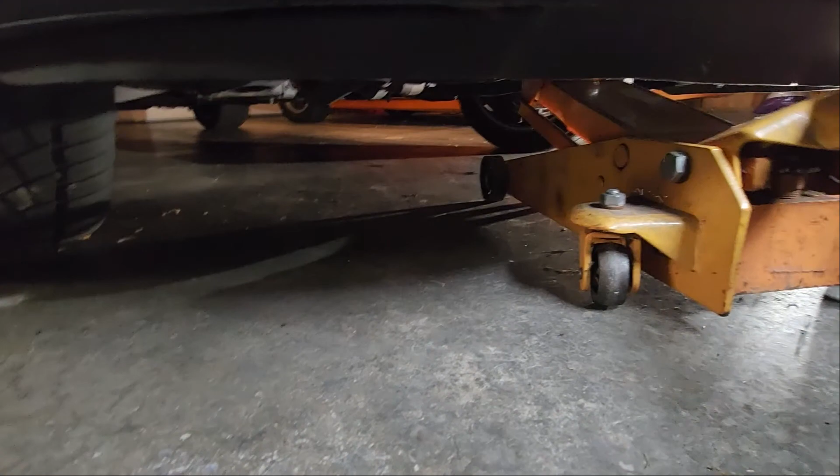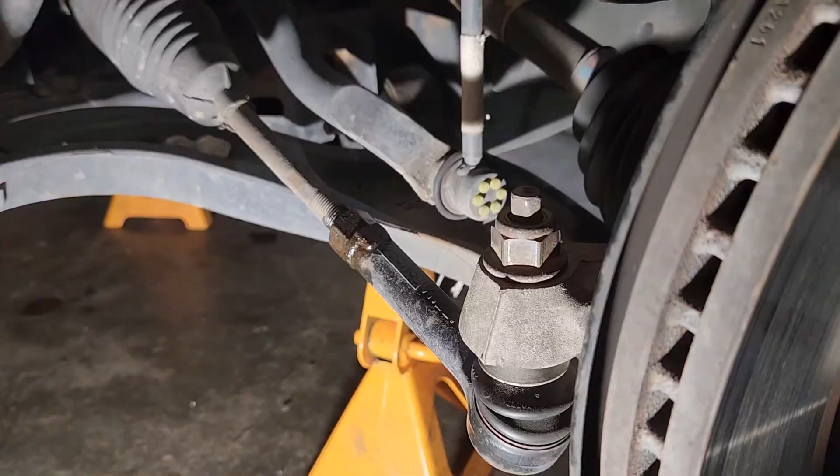Okay, so before you pop these off, or before you really go at them and break them, you want to get this loose here. That way it doesn't rotate on you, so you can use the knuckle here to hold everything. You need a 21mm open end wrench here and a 13 on the shaft to keep it from spinning.

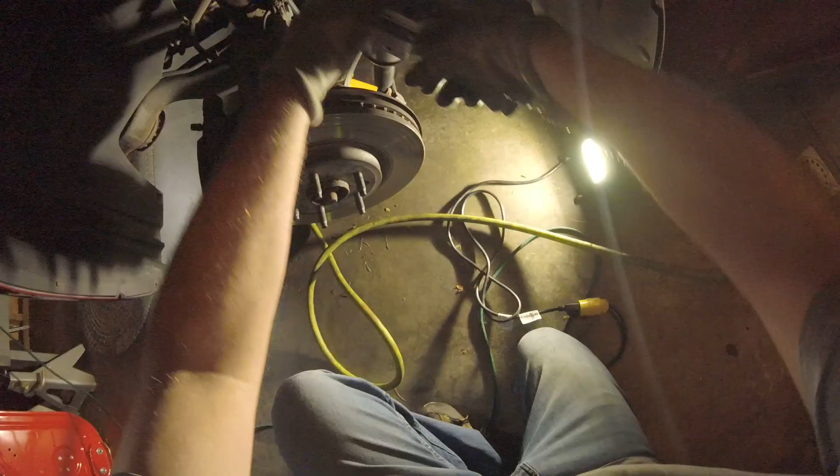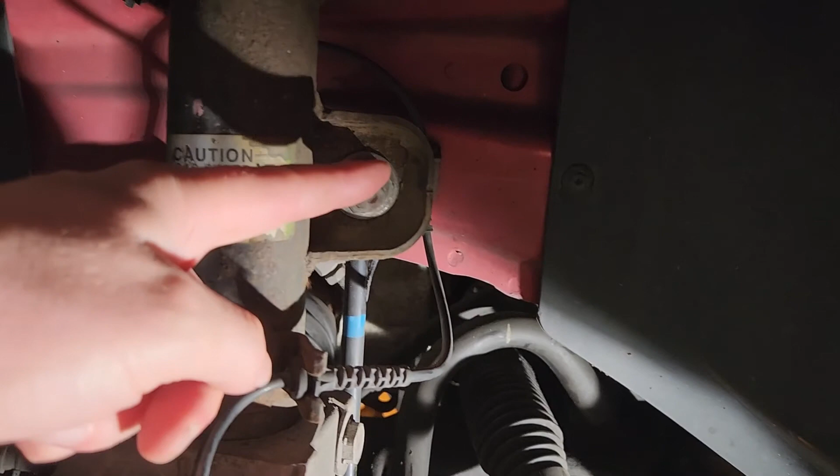Next, I think we'll take the sway bar. We'll hit the upper one. The lower one down here looks kind of hard to get to. I'm hoping maybe we take both of those off. It'll swing up and give us a bit more room in here.

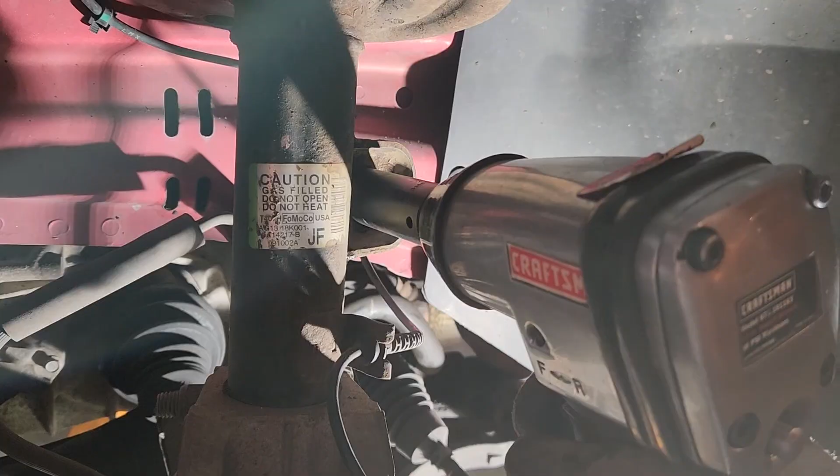Next, you want to make sure the steering wheel is as straight as you can get it, and then I marked it there. You can see it with a yellow paint marker just for reference. You get in there with a 10mm ratchet with a small extension on it, and you can get on the bolt and pop that off. Take note where the flat is — it's towards the front — and the clearance for the locking bolt is towards the driver's side. Just take note of that because you're going to have to get it back the same way when you go to put it back together.

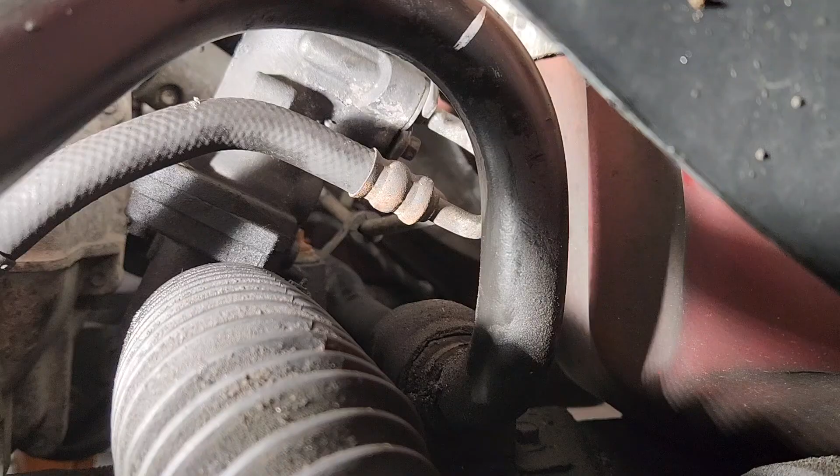After you get that bolt off, what we'll do next is pull the supply line off. You can kind of see the bolt that gets it right there. You can get it from the back side. If you have the SHO version with all wheel drive, it's probably going to be a bit harder because there's going to be a bunch of stuff in the way. This is front wheel drive only, so I should be able to get on that pretty easily.

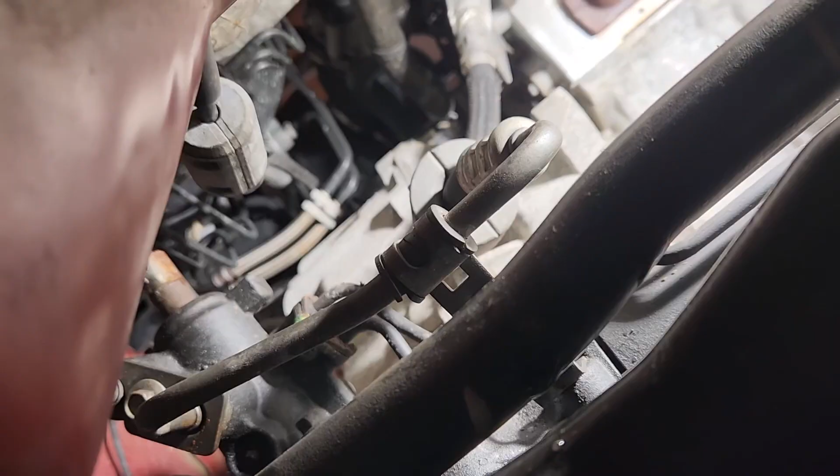Okay, so here's the plan. This bracket right here is held in with a 10mm bolt. You can't see it, but you can get a socket on here from above and work it out. You can see it there. So that attaches there, and I think what we'll do is leave this on here, and then come down and take out the actual two bolts that hold the rack in place.

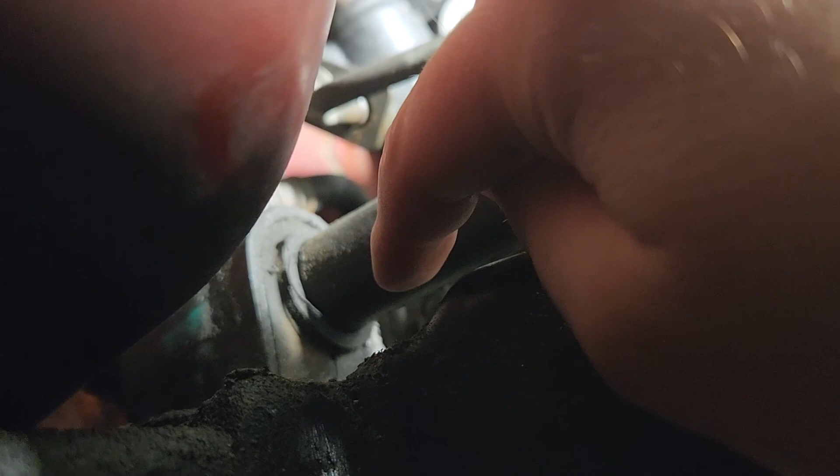Now, what I did do is on this side, I took out both bolts for the sway bar. You can get to this one from under the car, and the front side you can get from the wheel well. On the opposite side, the passenger side, simply remove the front bolt and loosen the back one, but you can leave the back one in. It's kind of tight and hard to get a socket wrench in there, but you can get into it — just leave it in there.

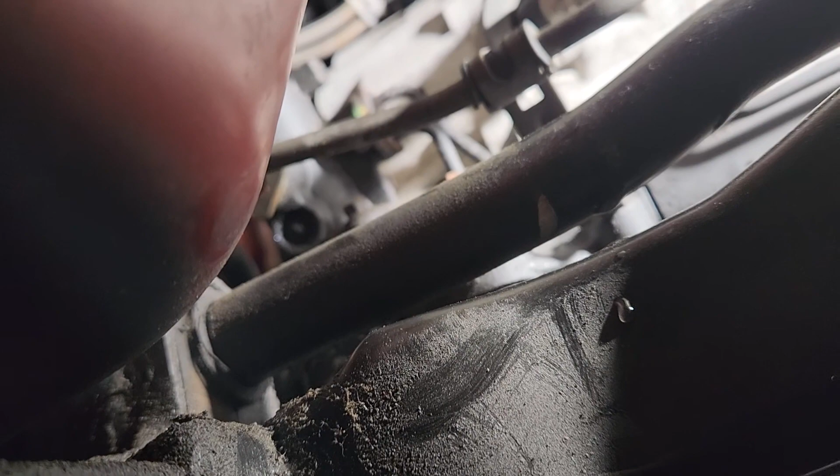I'm going to see if we can swing the sway bar back enough to get the rack out of the way. So that worked perfectly. You take the two main bolts out of the rack with an 18 millimeter and a 15 millimeter on top. Once you do that, you can easily rotate the rack, then get on the bolts that hold the main bolt that holds the line on, and drain the fluid out.

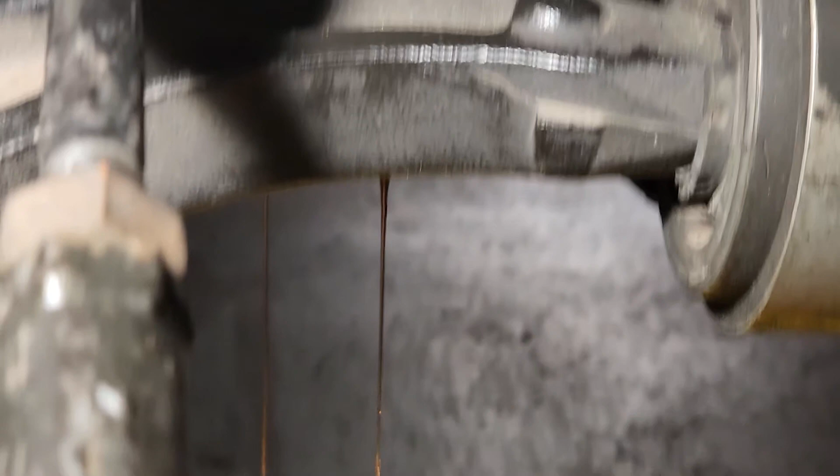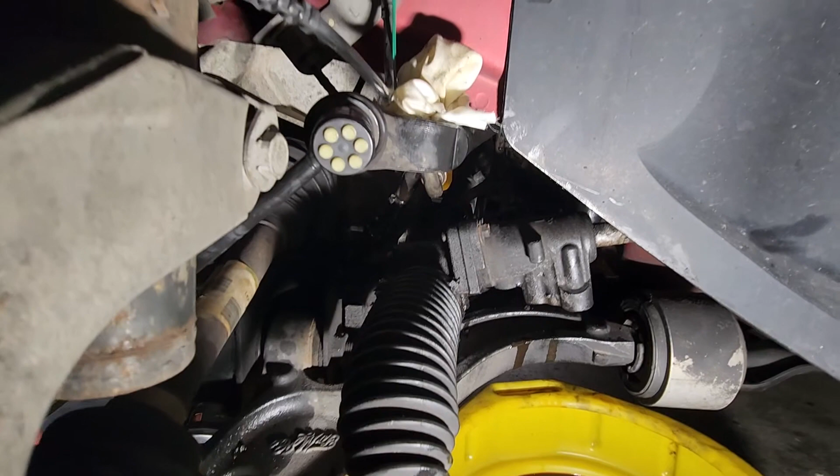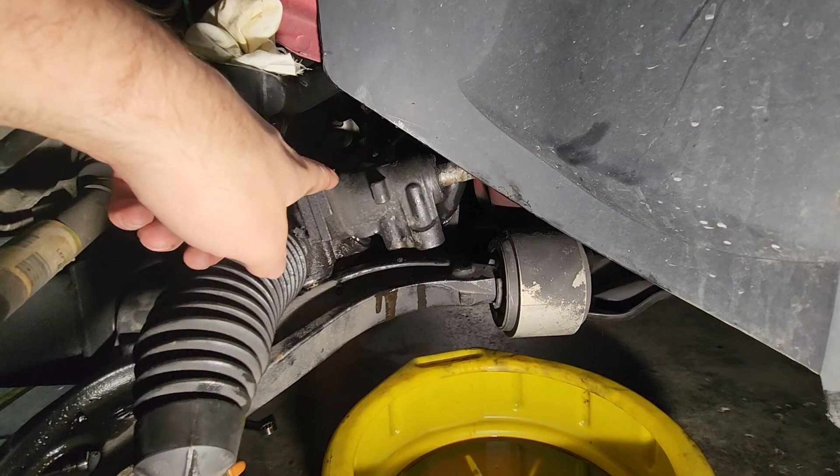So pretty straightforward — you leave this on here, and then you can actually use the other end to push the sway bar up and back, which allows you to rotate the rack, slide it forward, and rotate it clockwise from the driver's side point of view, so that the input shaft ends up down here. I tried going the other way with it — you can't, there's not enough room to get it up past the sway bar here. So if you push it in a little bit to get it to rotate, you can get the sway bar out of the way, and it'll come down and out.

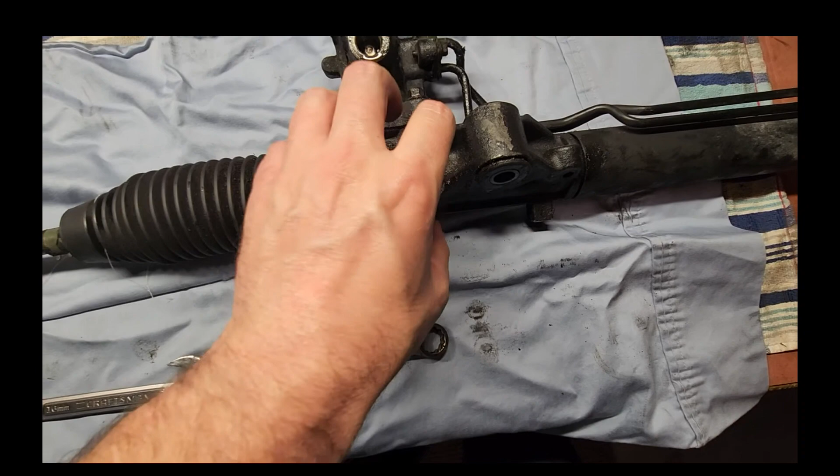Nothing obviously wrong that I can tell. There's no play in anything except this, which I can assume is the adjuster for preload. This is loosey — I mean, this is how tight it was, it's loose as a goose. So is that supposed to be tight? Let me think about that. And what keeps it from backing out? It looks like there should be a retainer plate on here, or a cap or something.

Okay, so it's the next morning. I was thinking about this last night a little bit more.

As I suspected, yeah, this sets your preload on the rack and pinion, and there's a process to set that up. You have to bring this in until it touches and then back it off, and then you measure the torque out on the input shaft to make sure it still spins freely. So there's a whole process, you can look it up on the internet.

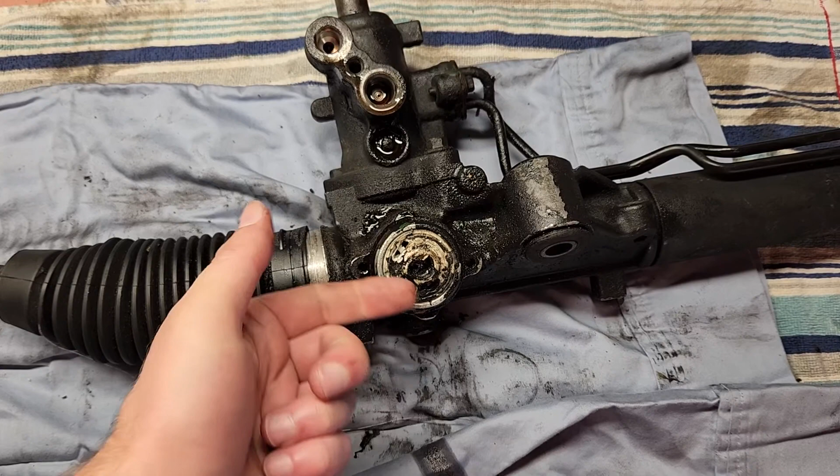So that would suggest that there's no bushing on this side. There's probably a bushing on this side to help guide the shaft. And I suspect because this was loose and there's no cap on here, this was backing out, which allowed the whole rack to move back and forth, which probably wore out the bushing and then ultimately the seal back here.

So I'm going to replace the whole thing, just to be on the safe side.

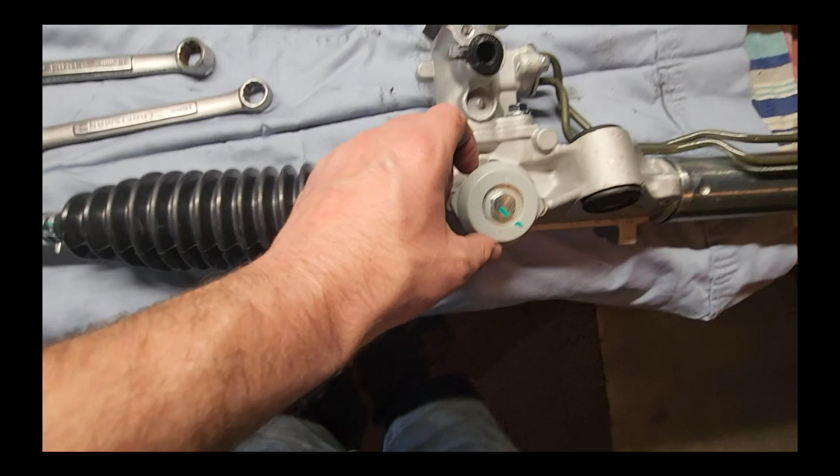Okay, so the new unit from Rock Auto, it has this plastic cap on here. You can see they even marked it.

Okay, so the next thing we want to do is get the new rack out, and we want to center it. You can see this is much longer than this, so right now the rack is shifted that way.

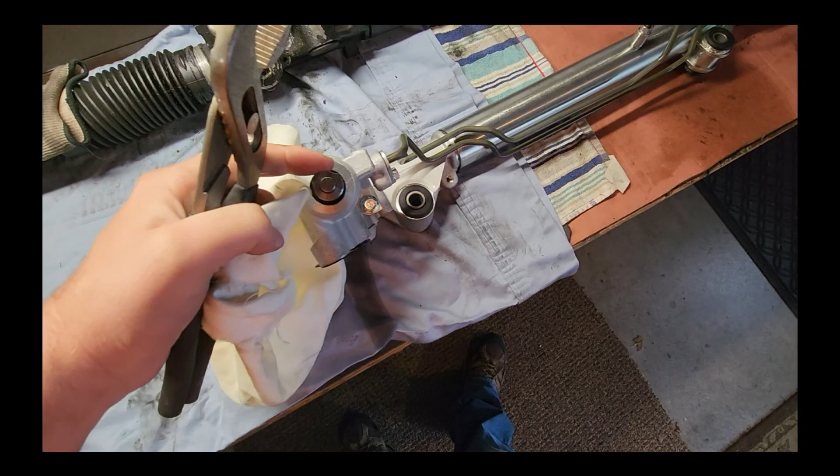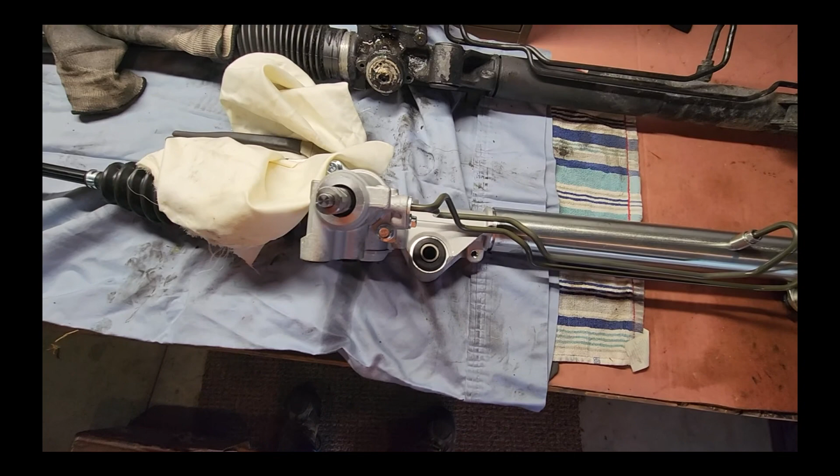So we've got to find the center, and what we'll do is get a pair of vice grips. We'll put a rag over this so we don't scratch up the shaft real bad here. We want to make sure we can get this on, and we'll rotate it all the way until it stops, and then rotate it all the way back and count the number of turns, and then we can divide that up and find the center.

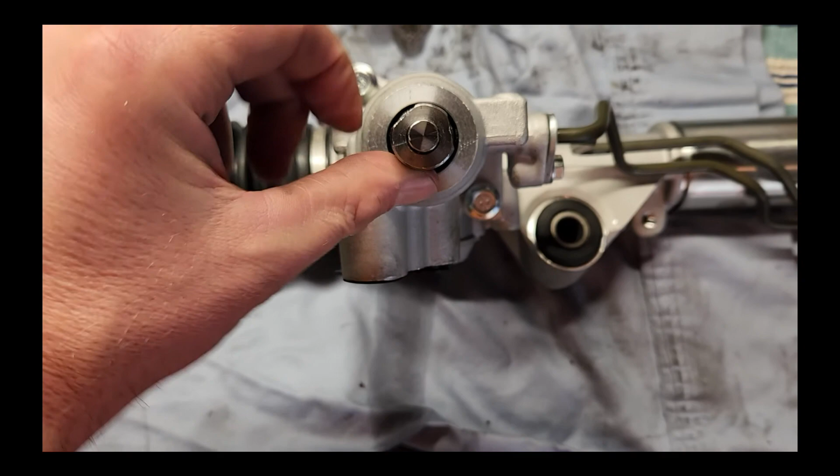Okay, so it's approximately 3 turns lock to lock, so you divide that in half. It's 1.5 turns, which puts you with the flats here and the bolt there, which then matches what came off. We didn't turn this, we had the steering wheel straight, we brought it off, so that tells us that the rack is centered, and we will have no issues with the steering wheel being off then.

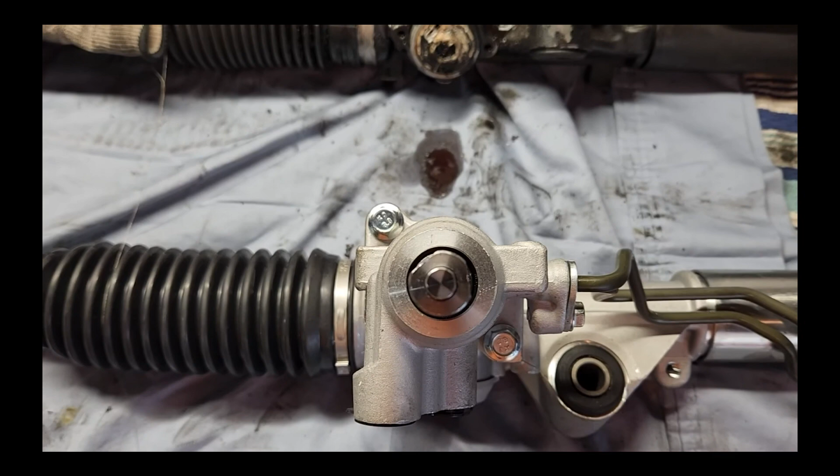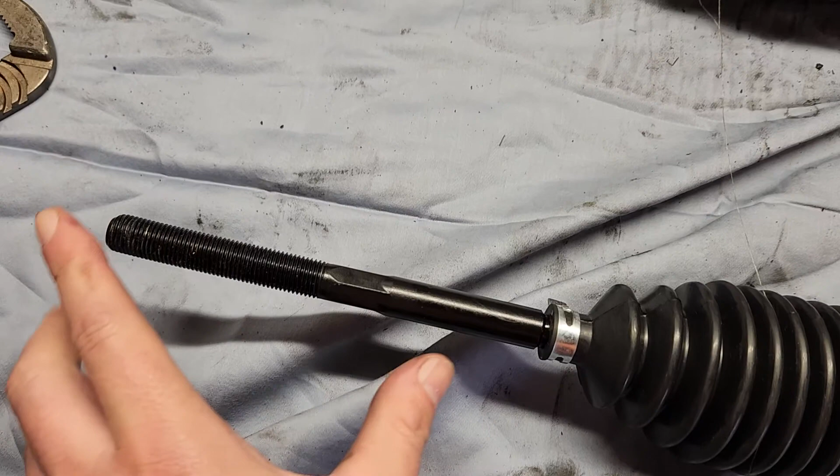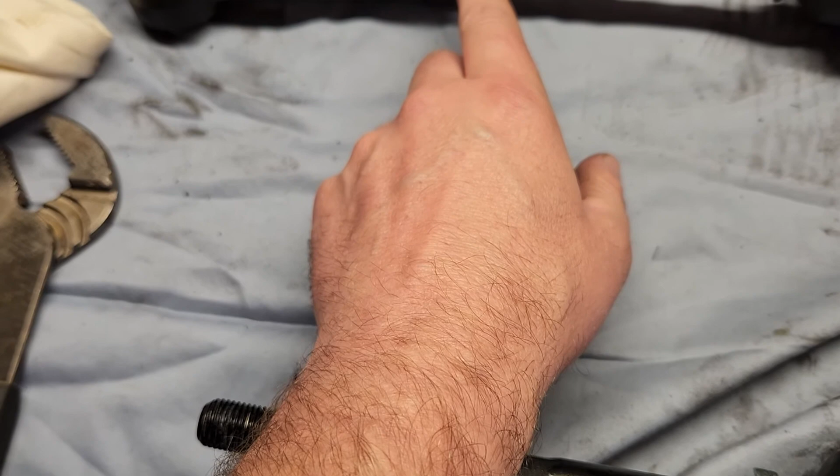Next, we want to transfer the tie rod ends from the old rack to the new rack. A good place to start, typically these are the same, not always. What we'll do is count the threads here on this side, and we'll do the same on the other end, and that'll be a good starting point to make sure everything's nice and even.

And we want to make sure we count the number of rotations that it takes to get this off, and we'll try to duplicate it on the new one, and we'll see how many threads are left. The key here is that you do the left side and the right side even.

It doesn't matter if you have too much toe in or toe out at this point. We're trying to get it even so that the steering wheel is straight. So we want to make sure whatever we do on this side, we have to do exactly the same on the other side so that we keep things nice and even.

So when we go to do our toe in and toe out adjustment, we'll have to rotate the shafts exactly the same to keep the steering wheel nice and straight. That way we don't have to go back and realign everything.

Okay, so this one took 28 turns to get off. Put it back on with 28 turns. I did measure the thread length on this, this one is a bit longer, so when you count the threads here, instead of 9 threads, which were on the old one, it's actually 10 threads. But like I said, this amount that they thread here is kind of variable, so it's just a reference, really, to make sure you get it in the right ballpark.

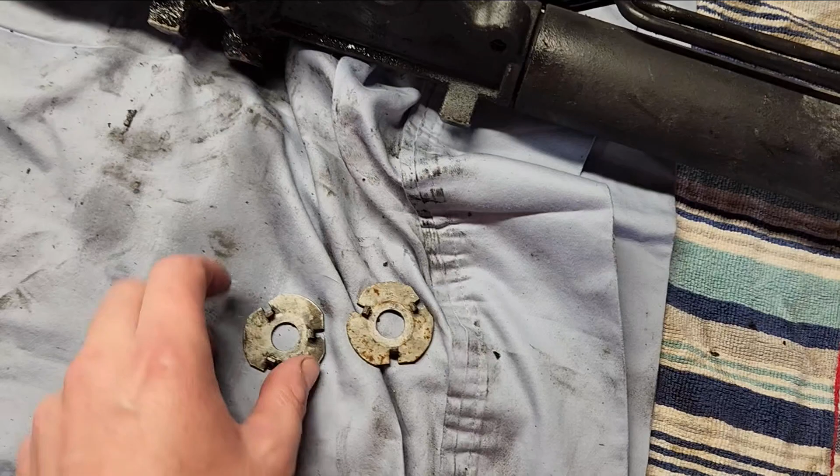Okay, so when we're putting this back together, you want to make sure you don't forget these washers. Sometimes they can fall down on the subframe, you don't see them, but they go right here like this with the little tabs sticking out on each end. What they do is these tabs align with the posts that are welded into the subframe and keep this washer from moving around during assembly.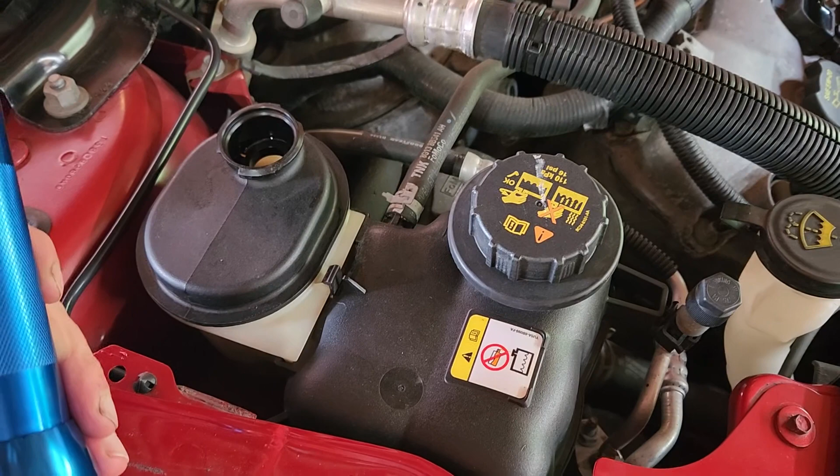Okay, so you put it all back together, but you just don't want to slap the wheels on and go driving off. We lost a lot of fluid in that, and you can see the reservoir here is empty, and we got air in the rack itself, so we got to bleed that air out.

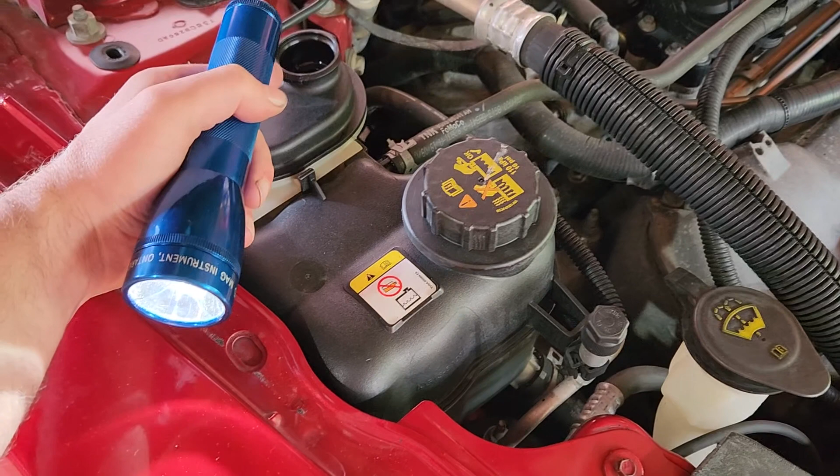And what we're going to do is put oil in here, it's Mercon V ATF, and then we'll cycle the wheel back and forth with no load on it. We haven't even started it up yet, and if you cycle the wheel back and forth, you can get more air bubbles out. So even though you haven't started it, it's still draining down in there.

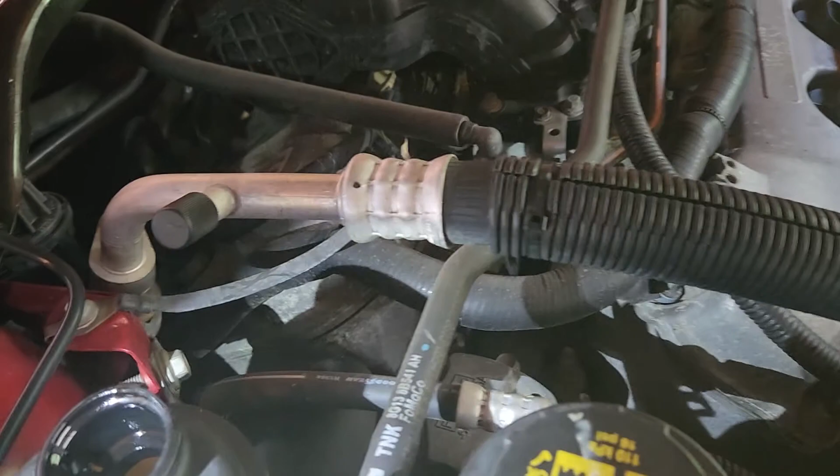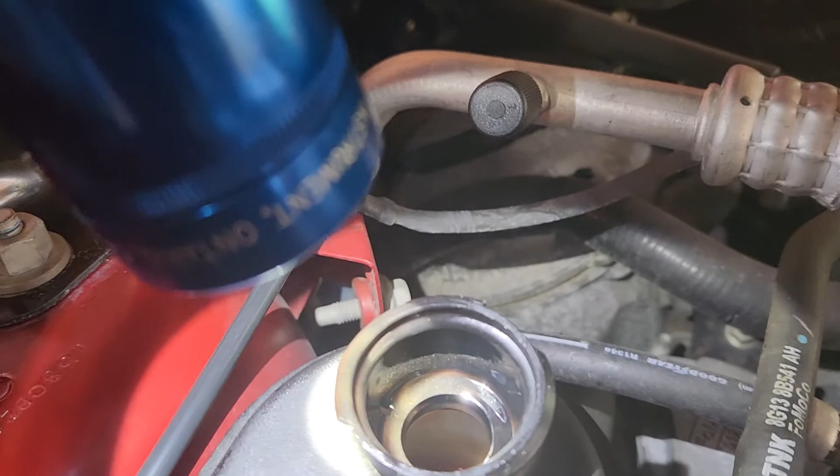Okay, so we started it up then, and we cycled it lock to lock, and it's kind of hard to see there, but we got more fluid, more air out. So we'll fill this up now until it's at the correct line, and then we'll just keep an eye on it as we start driving it.

So if you recall, we left the tie rod ends loose. That's fine, as long as we know that. We're going to put the tires back on and start the alignment process here. Part of that will be tightening those down, so don't forget about them. You don't want your tie rod ends coming off.

Before you start an alignment, the very first thing you want to do is check your tire pressures. We're at 28 psi, but the Taurus runs 32, so you want to check all four to make sure. You want to start with a good foundation. You don't want to start an alignment when your tire pressures might be out of sync.

So you want to try to get them as close as you can. Next thing we're going to do is back the car out of the garage and pull it back in. We're not going to go for a drive, remember the tie rod ends are loose. We're going to keep the steering wheel as straight as we possibly can, because you don't want a crooked steering wheel when you're done with this.

Next we install this angle aluminum—it could be steel, you can get these at any hardware store. You just drill a hole in it, run a bungee cord underneath, and hook it onto something. The goal is to keep it up as high as you can on the tire so you can get a tape measure underneath.

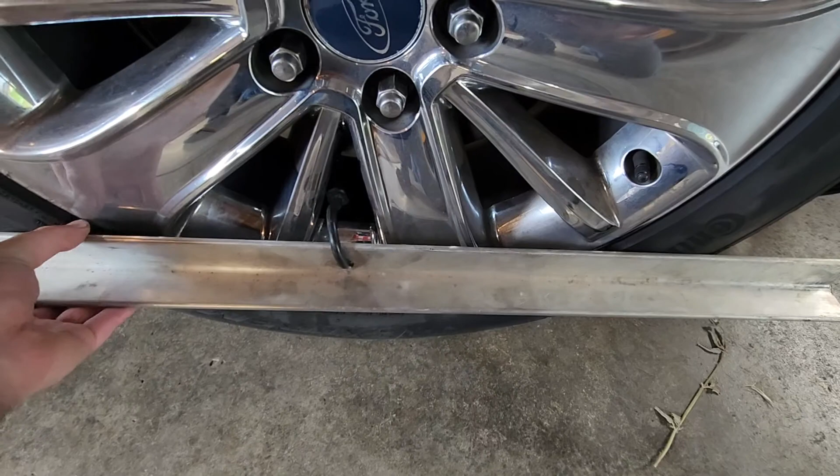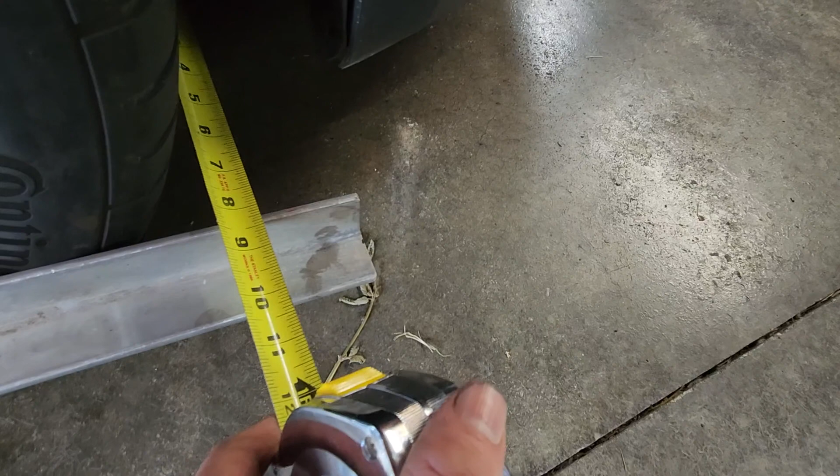So we'll hook the tape measure on the other side, come across as an example, and take a measurement using this edge here for our reference. We'll write that down and figure out how much toe in or toe out we have.

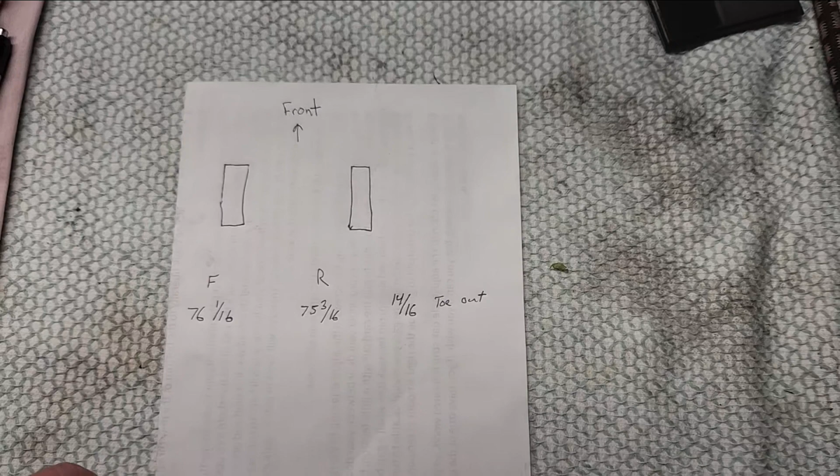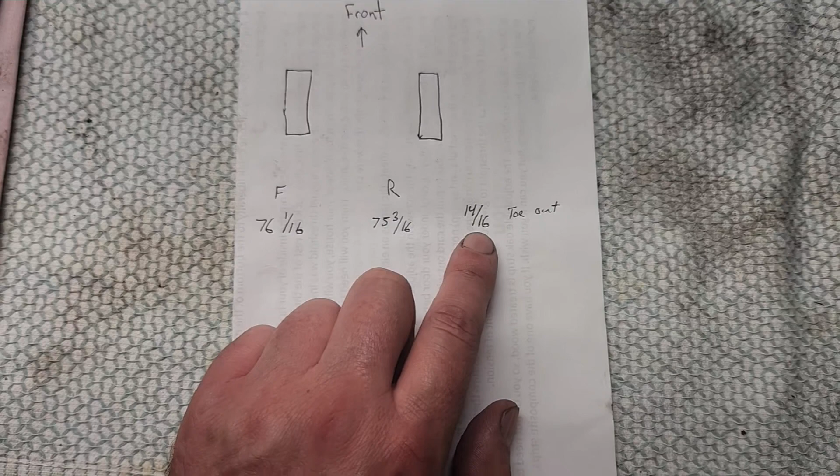So what you do is get yourself a piece of paper and write this stuff down, it makes it easier. In the front of the car we got 76 and 1/16. On the rear we got 75 and 3/16. So that's 7/8 of an inch toe out—that's quite a bit. So what we'll do then is adjust the tie rods.

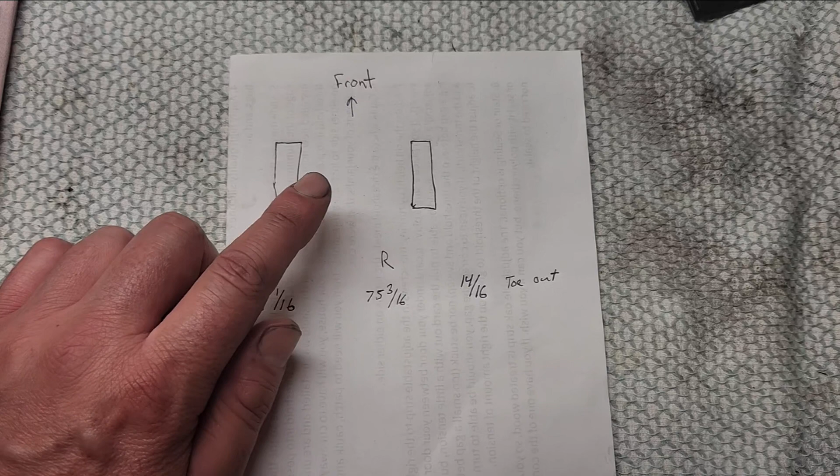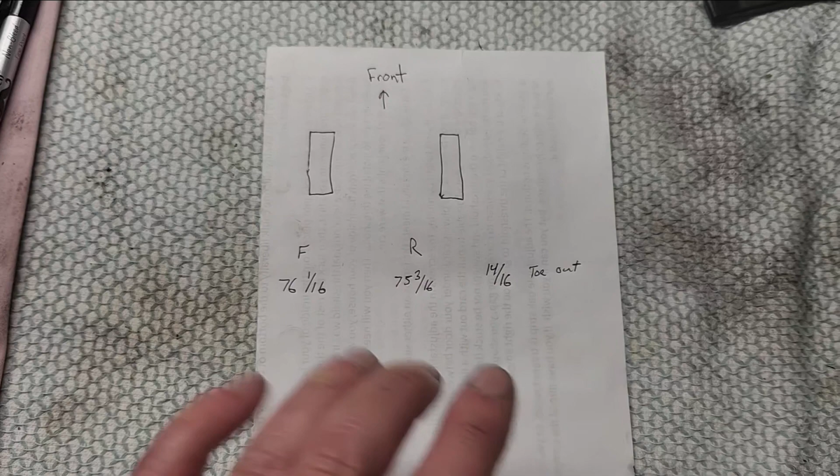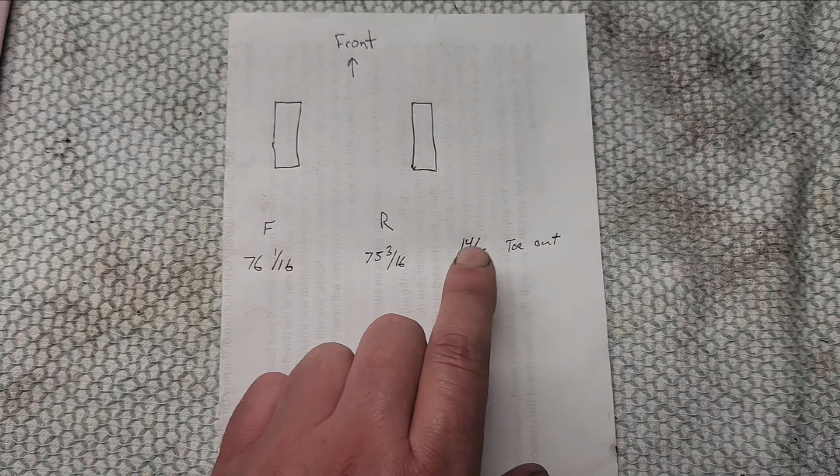You have to do it evenly—if you don't do it evenly, your wheel will be crooked. So you've got to count the number of turns you do on your tie rod ends to try to move this out. Right now we're doing a rough order of magnitude, so we're not going to move the car yet. Well, you can roll it back and forth to take any load out from the tires sticking to the ground. But the goal is to get this down to 1/16 of an inch toe in.

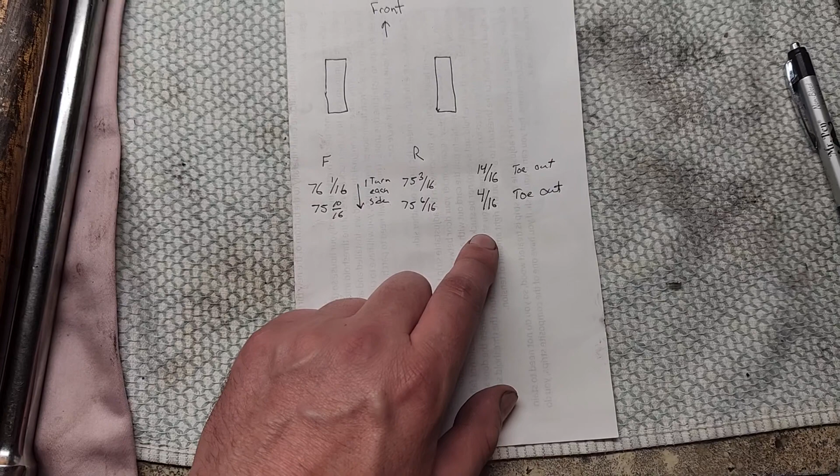So we did a full turn on each side, which is quite a bit, and brought us down from 14/16 down to 4/16 of toe out. So I think for the next round we'll go probably a quarter, maybe an eighth of a turn, and see where we land. Let's do a quarter turn and see where we land.

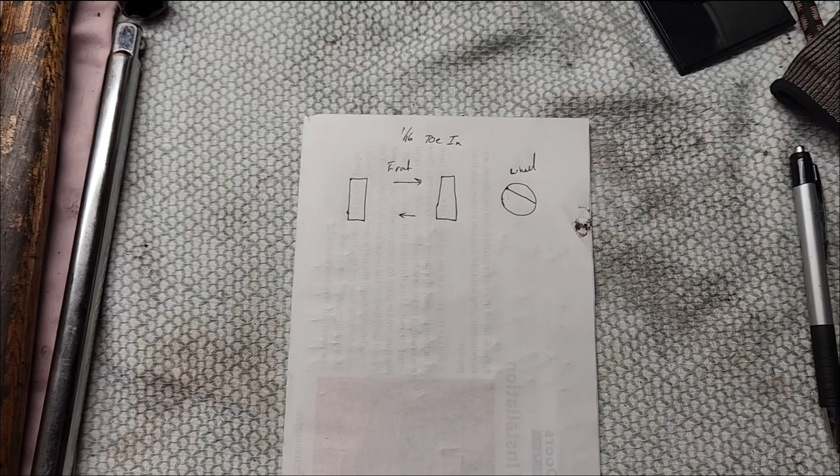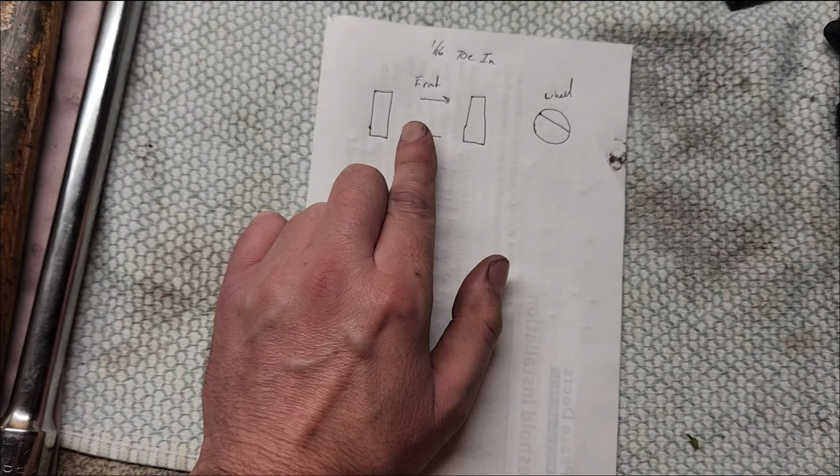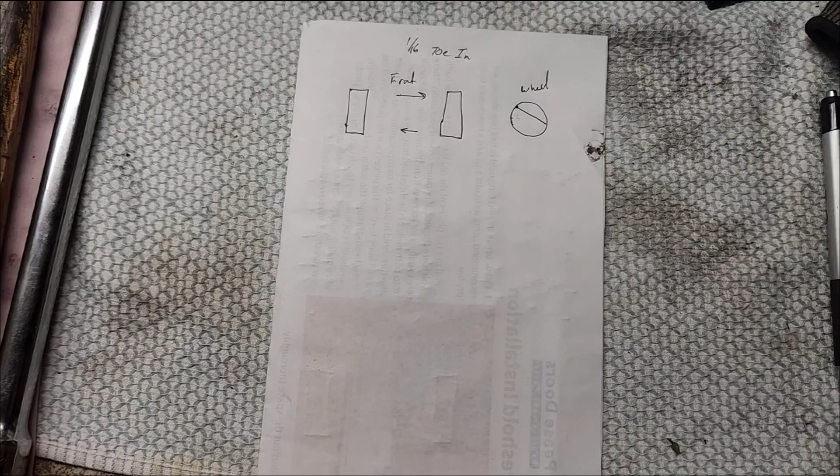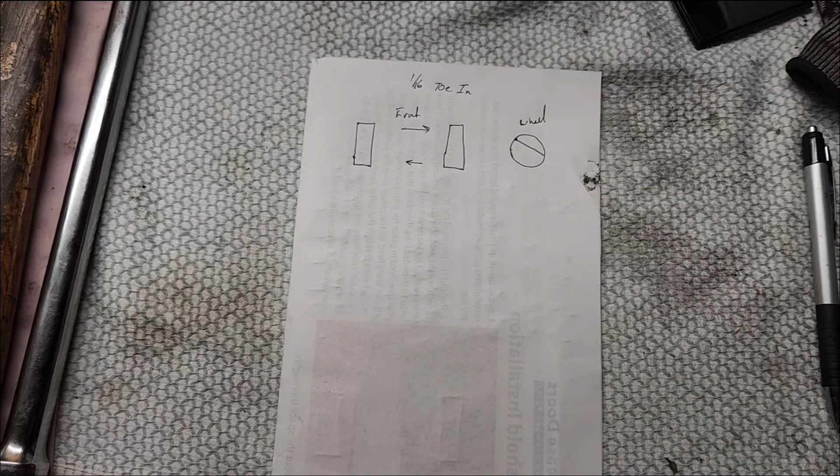Once you get it down to 1/16 of an inch toe in, just snug up your lock nuts on your outer tie rods and take it for a drive. In my case, the steering wheel is a little too far clockwise. So what we're going to do is equally adjust left and right to move the fronts of the tires to match the wheel, and the backs against the wheel, which should help straighten out the wheel. At the same time, we're going to keep checking this toe to make sure we're not causing it to go out.

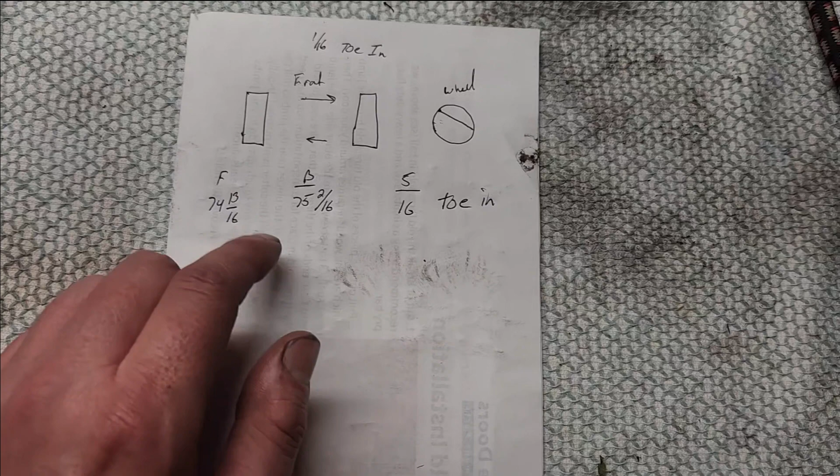So this can be expected after the first iteration of this. We started with 1/16 toe in, but we didn't really drive the car any. As soon as we take it out, things settle in—when you drive in and out of the garage, you try to get the wheel nice and straight. So now we kind of overshot it, and now we're at like 5/16 toe in.

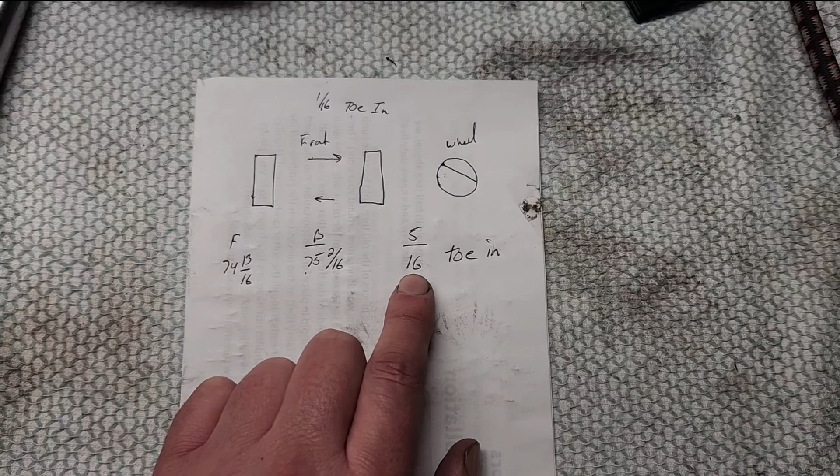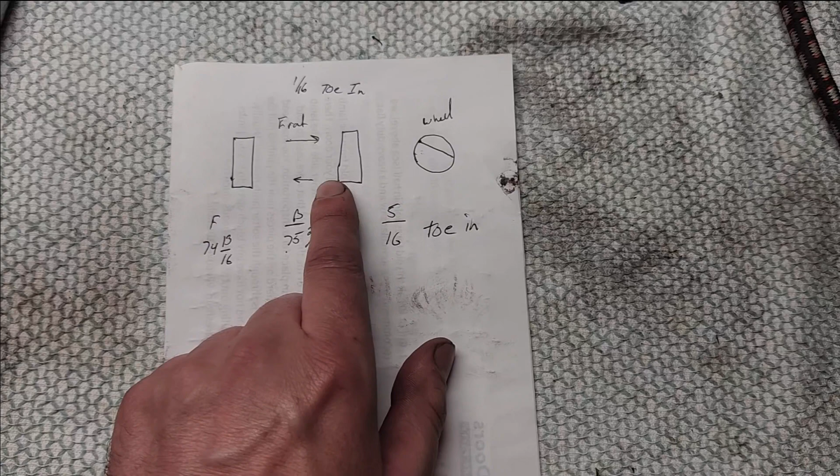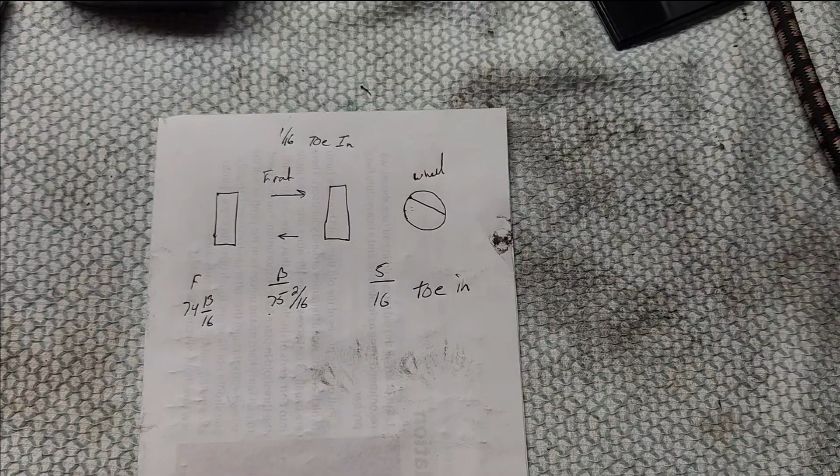So in this case, since we're trying to get the steering wheel back straight, we're going to take this right side here and give it a bit more toe out, which should hopefully bring the wheel back straight and also reduce this down. So we'll see how it goes—like I said, it's an iterative process.